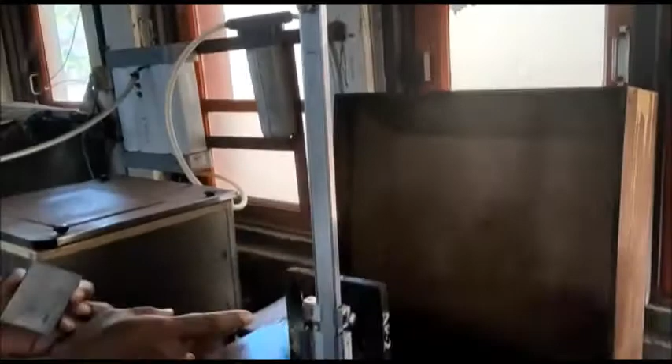Today, in this video we are going to show the job ready to mark for the tongue and groove model. This is the job in my hand, cutting the material and filing and ready to be marked in the height gauge shown here. This is a height gauge, this is the angle plate, and this is the surface plate. So we use these for marking.

Our instructor will show how to mark and the remaining things. We have the job, it is ready for marking. We have prepared all three adjacent sides, narrow sides 1, 2 and 3, plus 2 broader sides. We are going to do the marking on the broader sides, and the last side is not done, it's not required, so we have not done that. We have done only the three adjacent sides.

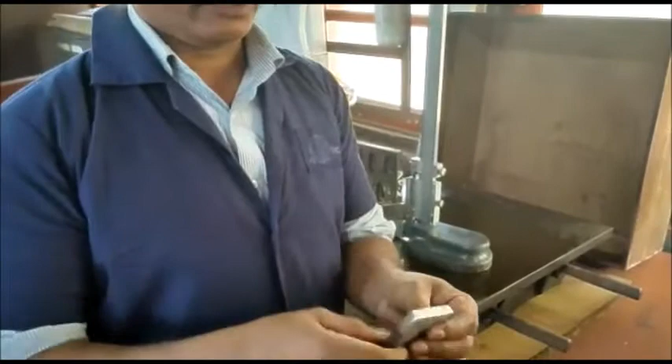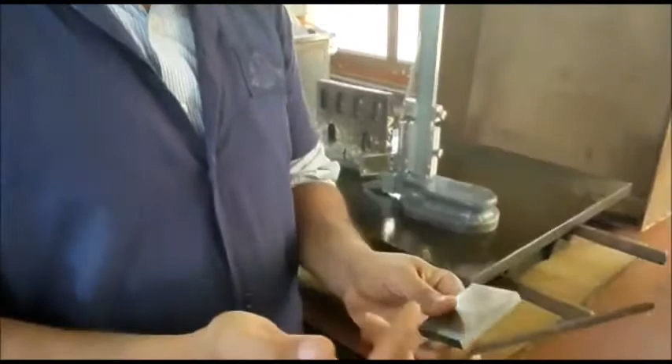Since we are filing on all the sides, a scrape will form on the edge, that is called a burr, and it can cut your skin while working. There is a burr on all the edges. You have to use a file and run it over the edge to remove that scrape, that burr. This process is called deburring. Deburr the job every time you file, just to avoid any cuts to your skin.

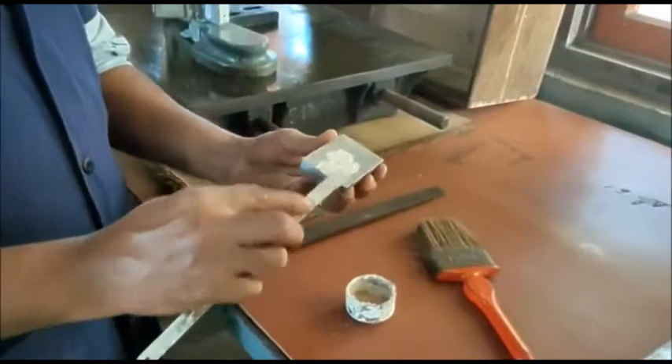Now we will apply the chalk. We have to soak the chalk in water to form a paste, then apply it on the surface. You have to apply it on the broader surface, because we are going to do the marking on the broader surface, not the narrow surface. Don't put it on the narrow surface, both should be the broader surface. So we spread the layer of the chalk.

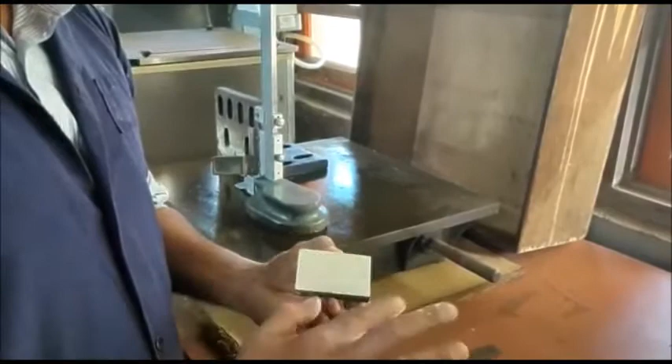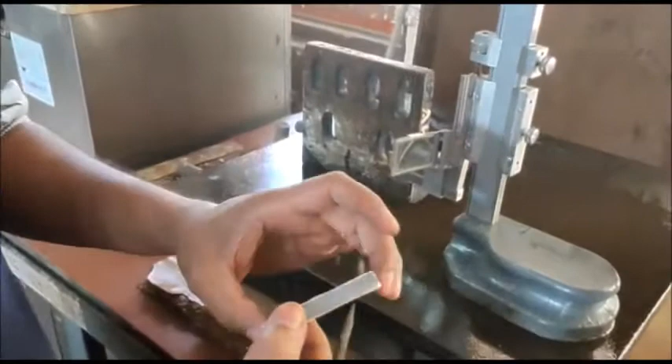Now it is wet, so we have to give some time to dry this. After drying only we can do the marking. This job is dried now, the chalk is dried, and you can see the three adjacent sides. These are actually very important, the three adjacent sides.

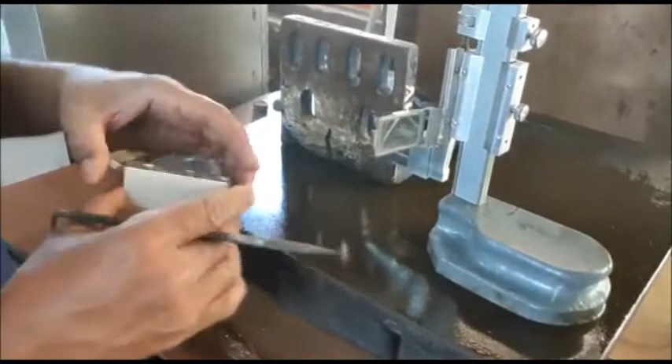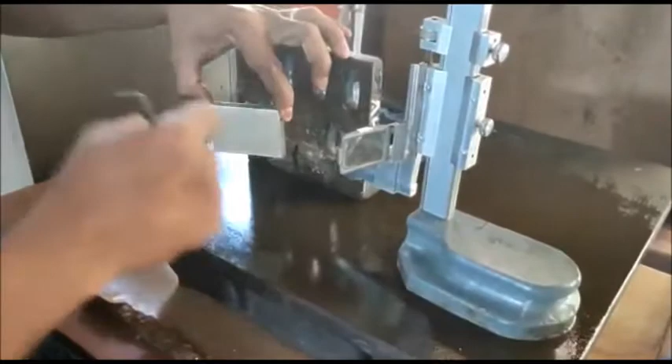This surface is true, so that is the zero index line that will go into the true surface. So we require a true surface, and for that we are using a surface plate. This job should always be vertical, 90 degrees to the ground, and for that we are using a support called an angle plate. It will help the job to stand vertical at 90 degrees.

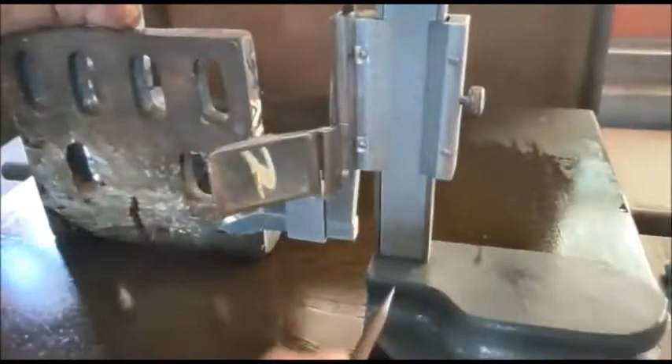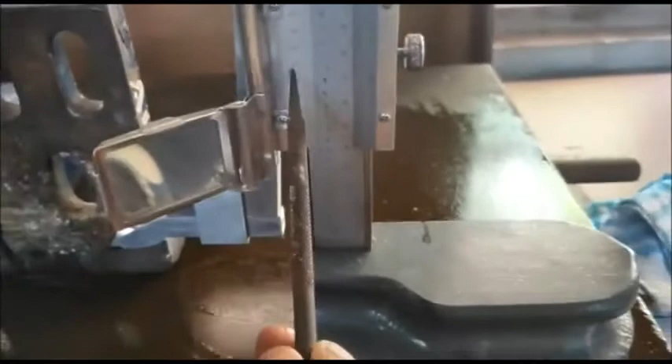The last one is the vernier height gauge. The graduation of the vernier height gauge is similar to what we explained in the vernier caliper. It will have a main scale on this pole, with two graduations: metric on the right hand side, and British standard in inches on the left hand side. We also have two vernier scales, left hand side British standard and right hand side metric. So we have to just focus on the metric side, the right hand side.

This part is called the vernier reading. We have 50 divisions, divided into 10 numbers, 1 to 10, but actually there are 50 divisions. The smallest division on the main scale is 1 mm. If you divide 1 by 50 you get 0.02. So the least count, or the accuracy of the instrument, is 0.02 mm.

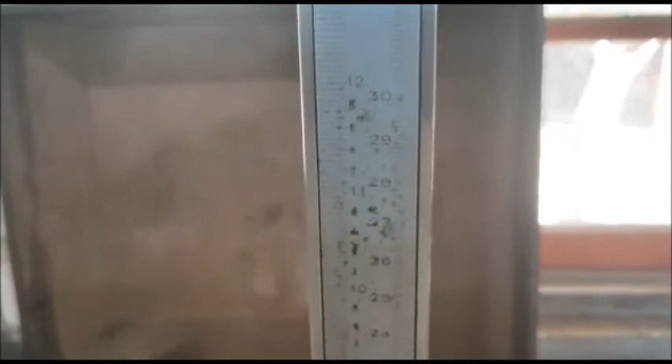Here we have the graduation, you can see 0, 1, 2, 3. We will have up to 30 centimeters, that is 300 mm, so we can measure or mark a job up to 300 mm. Here, what we have to do is not marking, but setting the dimension. We have to set the dimension as per the diagram.

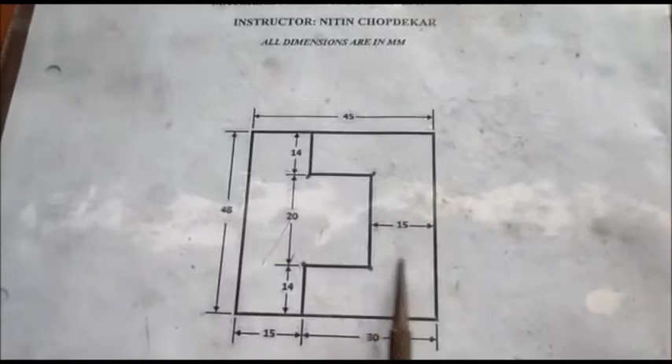Okay, all this dimension we have to transfer on the vernier scale, and then we have to just mark it on our job. So all these dimensions, we have to mark them as two separate parts.

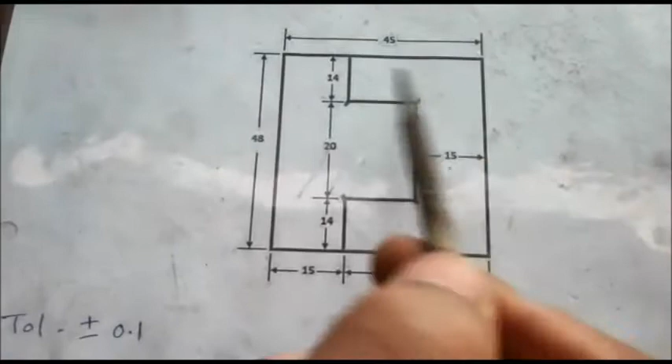The dimensions are very easy. This part from here to here and here to here is mentioned as 15, and total is 30. So this part is also 15. This is 15, this is 15. Again for this part also it is 15 and 15. And then we have 14.

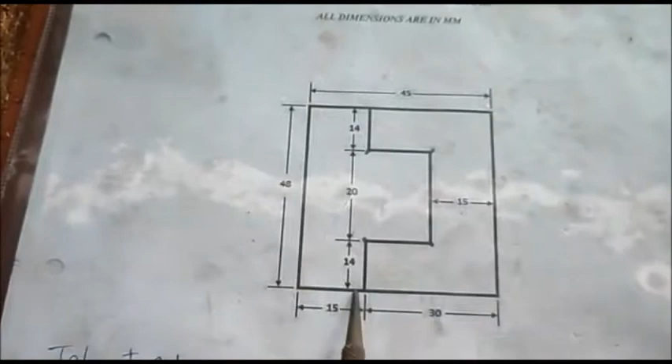Then we have 20. The center part is 20 on both the parts, it is 20 mm, and at the other end it is 14. So 14 on both the ends and middle part is 20. So total will become 48, that is what the length shows. And here 15, 15, 15, total length will become 45.

So you have to just memorize these dimensions while marking and while also preparing the dimensions. So what we'll do, we'll hold the job.

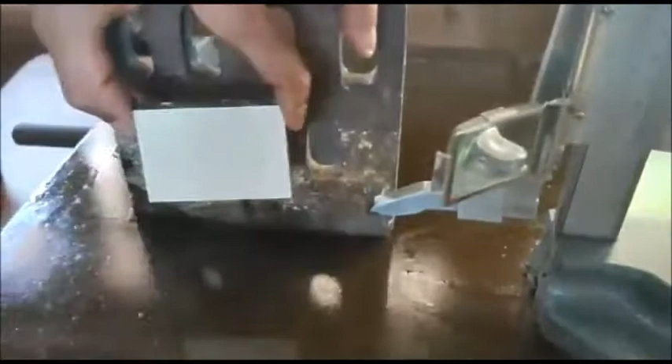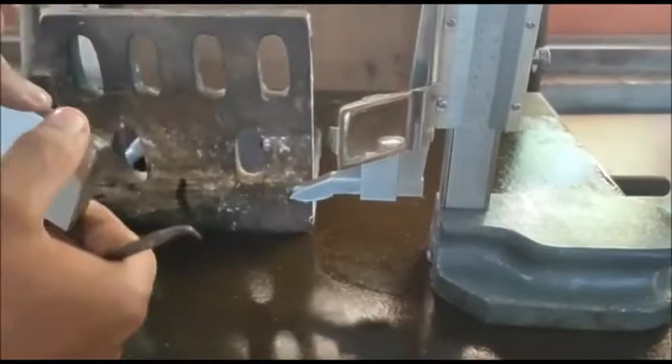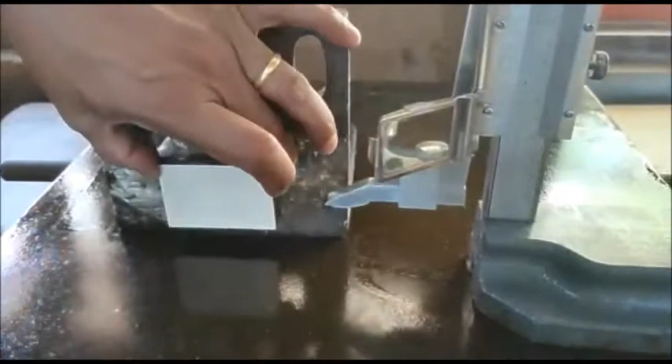We'll hold the job on the surface plate. Very importantly, you can ground the job with only the three adjacent sides which you have prepared. The first one you can ground, we have prepared this accurately. Then the second adjacent one you can ground, and the third adjacent you can ground the job. Do not ground the job from the fourth side which you have not prepared. Never ground it, this is the undone side. So you have to just make sure you take the job from the proper sides.

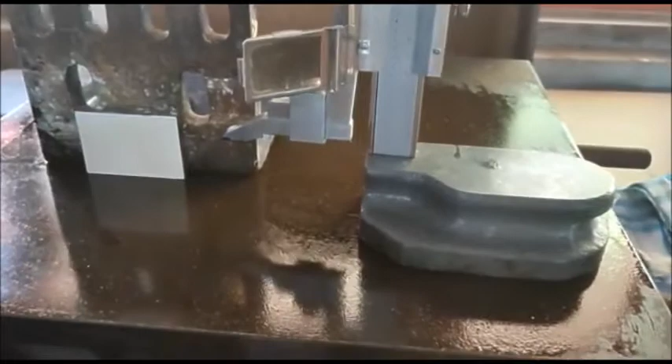So we are going to set the dimension for the first line. I will mark 14 mm. So what you have to do, you have to focus on the 0 index line from the vernier scale. Open these bolts and take them down.

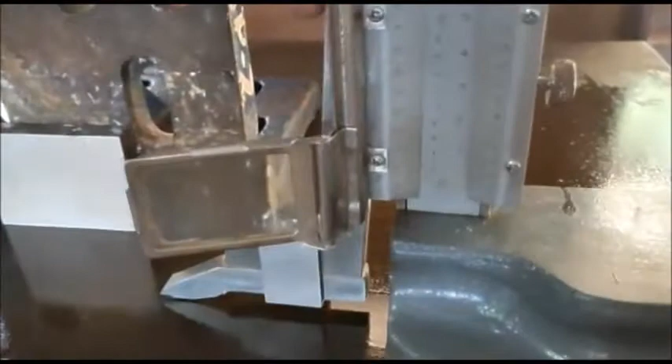Always before you start, always calibrate, check the calibration. You have to ground the scriber to the level of the tri-square and check for the zeros. Can you just focus on this 0? You can see 0 and 0 is coinciding. That means the instrument is calibrated, so it will not get any error from here.

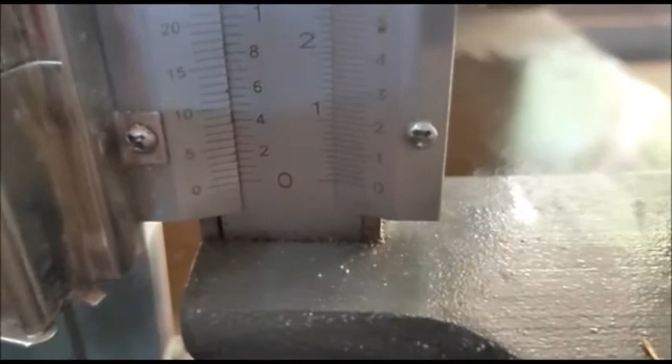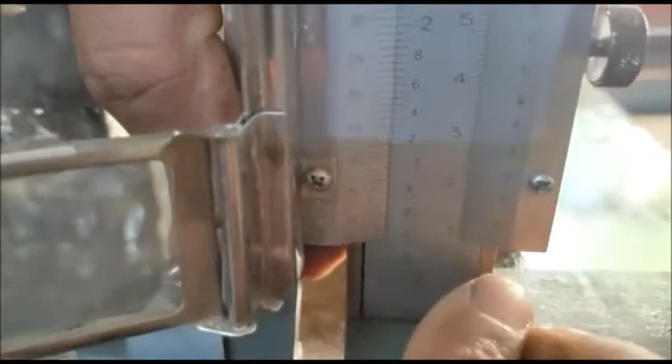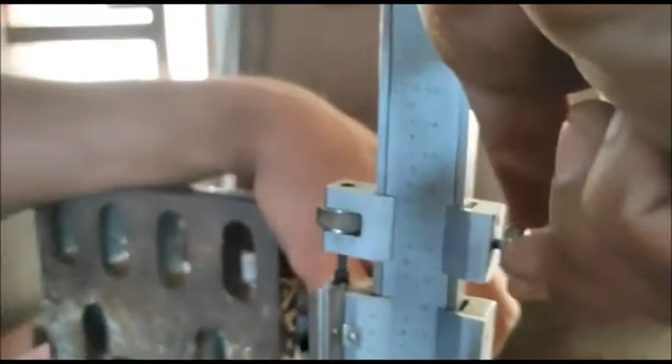Now we are setting this to 14 mm. So lift it, 14 is somewhere here. Since it is a very precise dimension, we cannot get it directly, so I've taken the 0 close to 14. To do the precise dimension, I am going to lock, sir, just point on this, I'm going to lock this. There is a clamp that will lock this and it will not move.

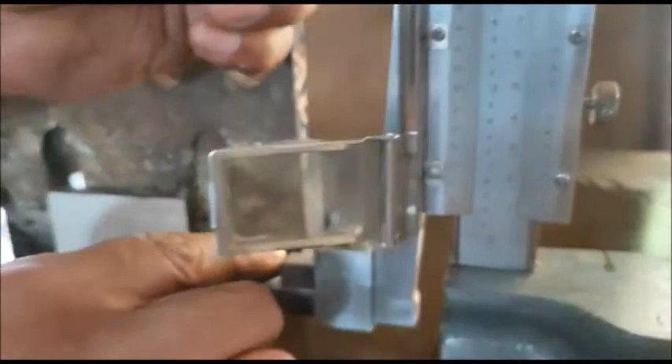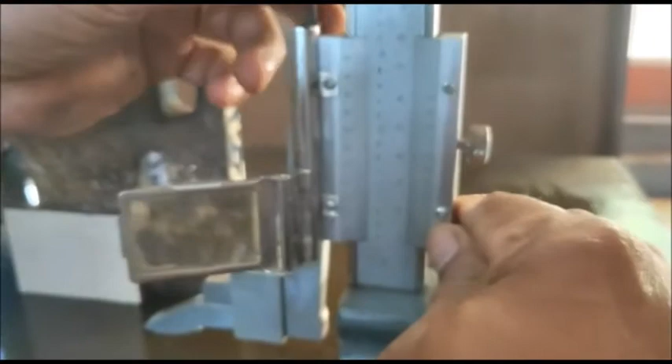It can be only moved by moving this adjustable. So now this is activated, we can adjust the scale. I've adjusted the dimension to 14 mm, this shows. You can see this 0 is exactly aligned with the 14 division on the main scale.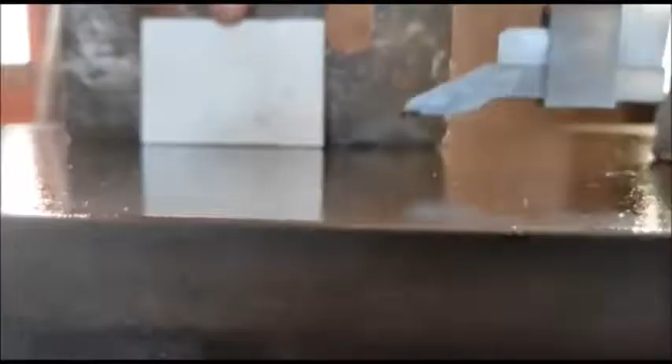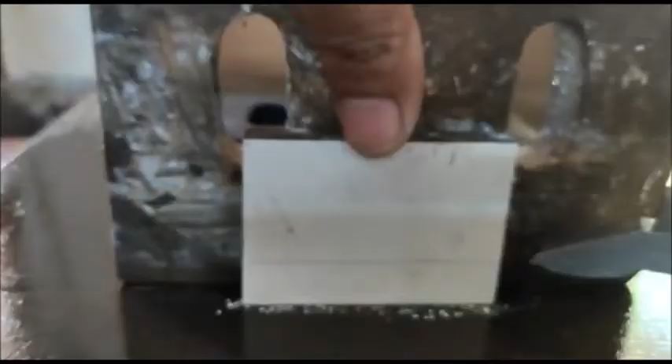Scriber. So what we can do, we can draw horizontal lines using the scriber. I have drawn a horizontal line, can you see that line? So we have another 14. We have marked this 14 line. We have another 14 from top.

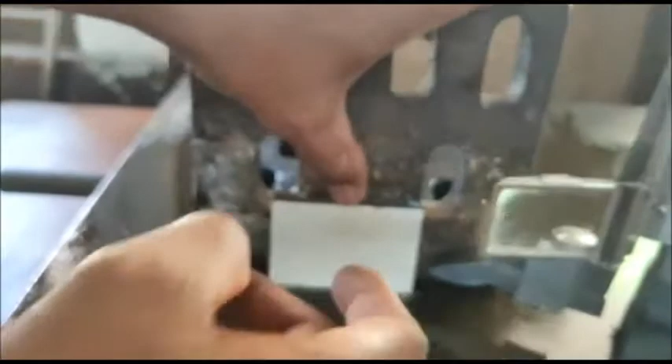So if you think we can turn the job and mark 14, it will be wrong, because again we cannot ground the side which I have not done. So that will not do. In fact, we will just club the dimension now. The middle part is 20, so we have to add 20 to 14. So next line would be 34.

This is set to 34. We will draw the next line which will go on top, and both the lines will be parallel. The first one was 14, second one was 34, so it will give us the dimension of 20.

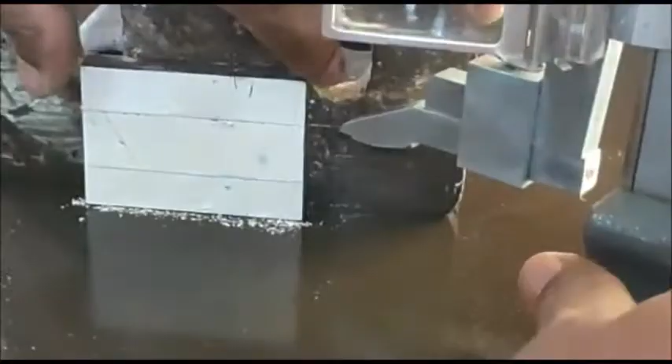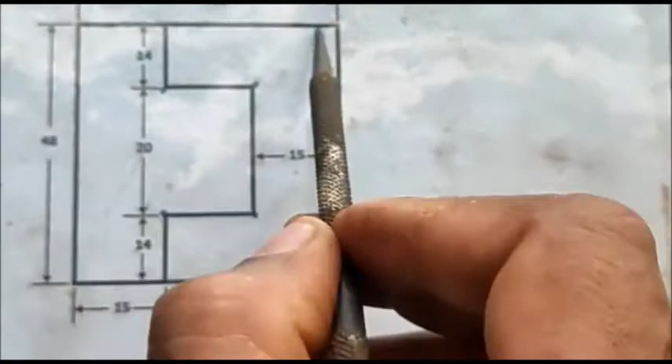This 14 line is already drawn, we got this dimension. The next was 34, so we got this 20 as well, this line. So we want the final one, top, that will give us the 14, so it will be 48.

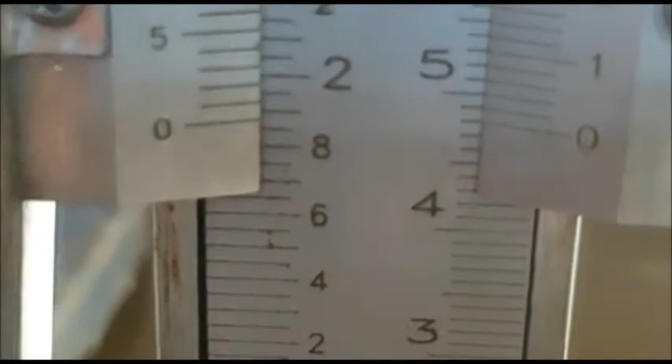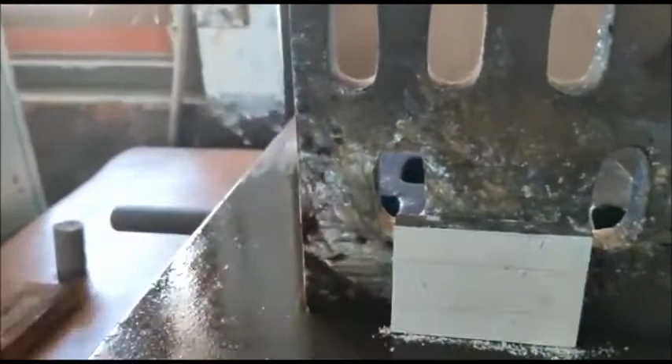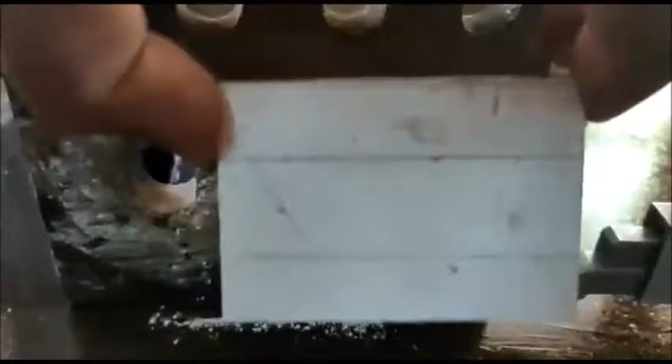So we are going to mark this same dimension on the back side. This we have done on both the sides, so you can see the lines are done on both the sides.

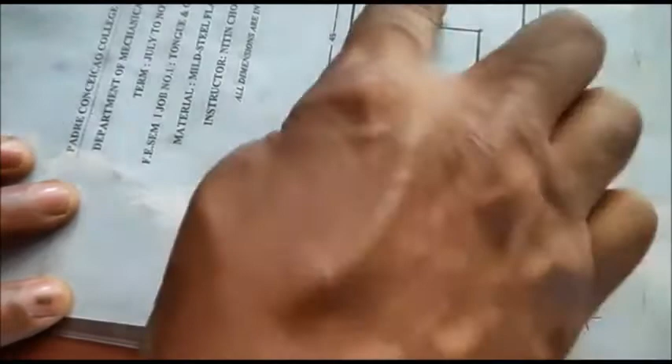So we have completed this one side, we are going to mark from the adjacent side now. The job will turn this way, and we are going to mark this dimension. It is actually two parts, we have to separate them also, and the dimensions are very simple. 15, one line, the second line is 30, so the width of the job is 30. Both the pieces will be of 15 and the center line is 15.

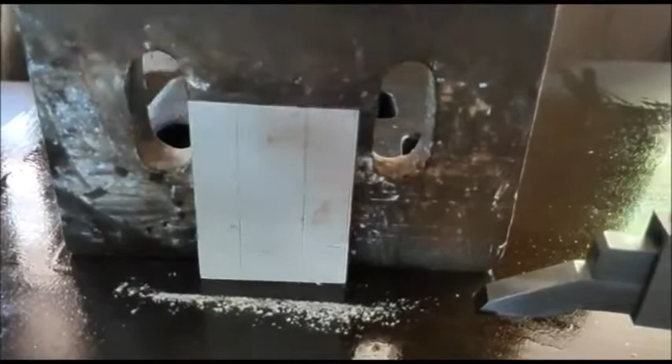So we are going to hold the job this way now, vertical, and these lines will come this way now. We are going to start with the 30 mm. You can see the dimension, we have set this to 30. We will draw a line from one side. So this we have marked as 30, actually this is one job.

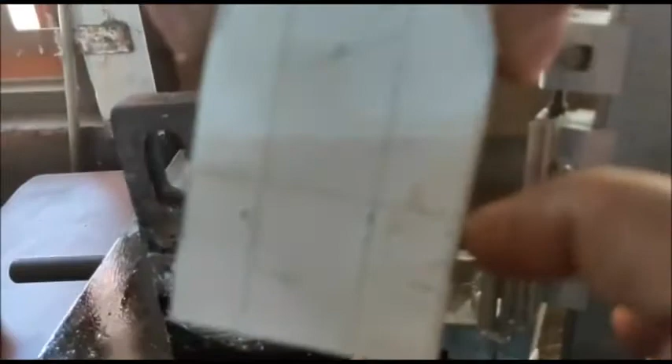And we have to mark from the other end. So here we are going to switch the sides and mark 30 from here, that will be the second part. You can see we have marked 30 from both the ends. So the same thing we have to repeat behind.

30, switch the side and mark 30. You can switch here because since we have prepared both the adjacent sides, they are true. So now we will change the dimension to 15 as we said. This is 15 now, 15 mm.

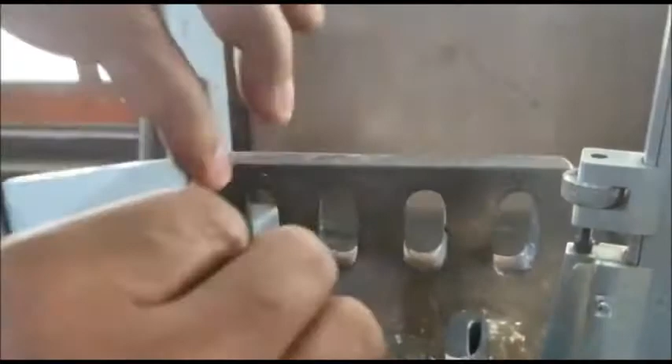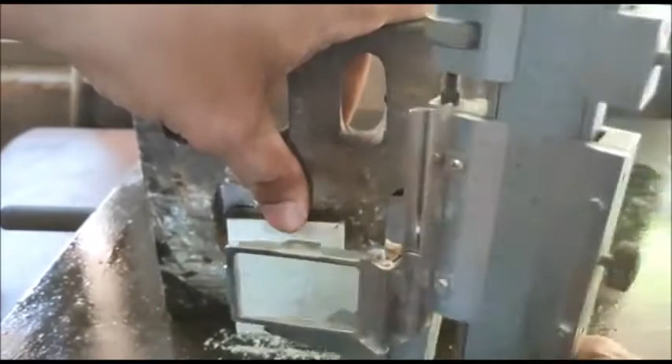So what I'll do, I'll just mark at the center because this throughout line is not required. You have to just intersect these two sections, and this will be our groove job. The other end it will be a tongue. So I'll mark on the outer sides. Even if you can draw a complete line, there is no problem. Behind, when you do it in the same way, I'll just mark for the tongue, outer sides, and for the groove on the opposite side, and I'll just bisect the middle two lines. That's it.

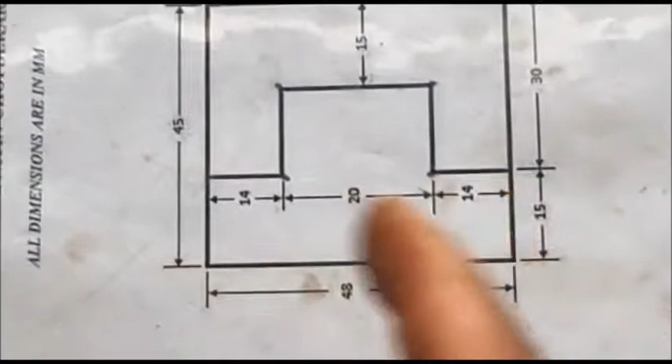These dimensions we have transferred them accurately, exactly what we have on the sketches we have transferred to the job. So these lines we have to keep them permanent. See, these are just lines drawn by the scriber, it might disappear, so we are using a dot punch here and a ball peen hammer for the purpose.

What you have to do, we have to keep the tip of the dot punch over the line, on the intersecting point, and you have to hit one strike, only one strike you have to give. Don't keep on hammering like this, the wrong way. You have to just pick the intersecting points and hit once, one shot on the line, carefully on the line, and hit on the head.

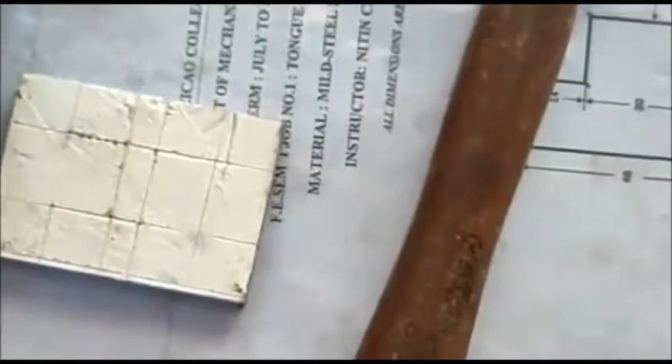Here to do it, and then you have to complete this line by punching close dots, till it forms a line. So we have completed on this one side. If you see the dotted points, they are slightly outside the line. It looks like on the line, but slightly they are favored outside the line, so that they don't remain after completing the job. After we finish the job, these edges will be clear, not with the dotted lines. Slightly outside, not too much outside, slightly outside the line.

We are going to do this.